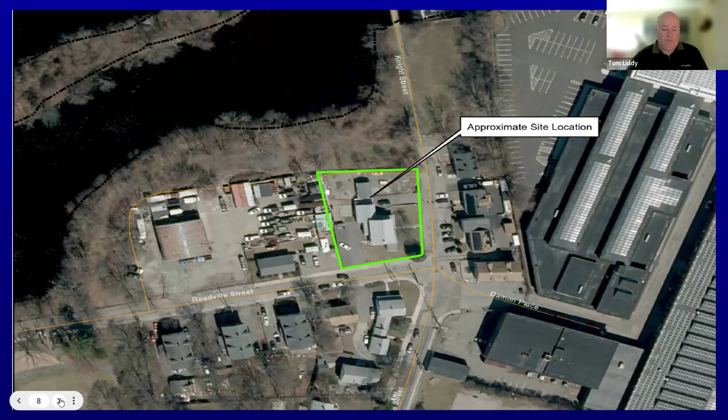To the north of the property is a wetland system associated with Mother's Brook, a perennial waterway with associated 25-foot riverfront area and waterfront area. There's a 100-foot buffer zone offset from the edge of BVW associated with the river, as well as the bank of the river. If you could advance to slide 3, please.

So this is a photo of the existing conditions as of last month. You can see there's been some earthwork that occurred. This area was all developed previously, so there's no removal of any vegetation, trees or shrubs or anything like that. This is the eastern part of the property; Knight Street would be to the right of the screen. If you could advance to slide 4.

And so this is the rear of the property. You can see there's been some earthwork, but this is very similar to what it was prior to the work that occurred last year. You can see a stockade fence in the rear. Behind that is parkland owned by DCR, and then Mother's Brook is off to the north.

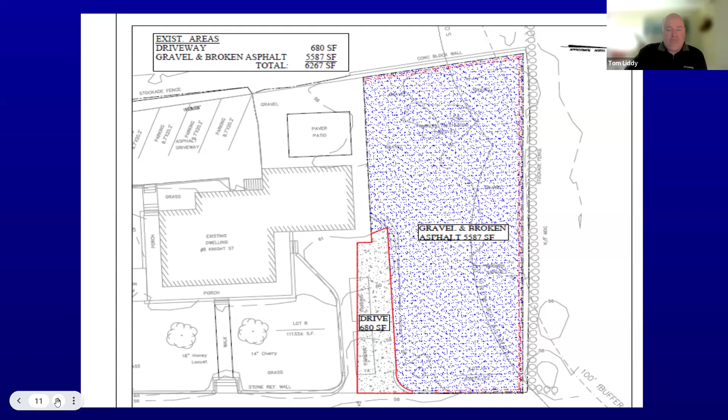Okay, so this is the proposed project. It's basically a 3-story, approximately 1,600 square foot, 3-unit residential building. You can see the 100-foot buffer zone, which extends to the east of the site. All the building and parking area in the rear has been located outside the 100-foot buffer zone. Any runoff from the parking area will be conveyed into a 2-foot deep sump catch basin, and then will be infiltrated with an infiltration system right next to it.

All the rooftop runoff will be directed into another infiltration system and 2-foot sump catch basin in the front of the property. And the existing driveway will be removed, and that area will be graded and loamed, and grassed into the property. Also, the existing stockade fence is in disrepair, so that will be removed and replaced in kind.

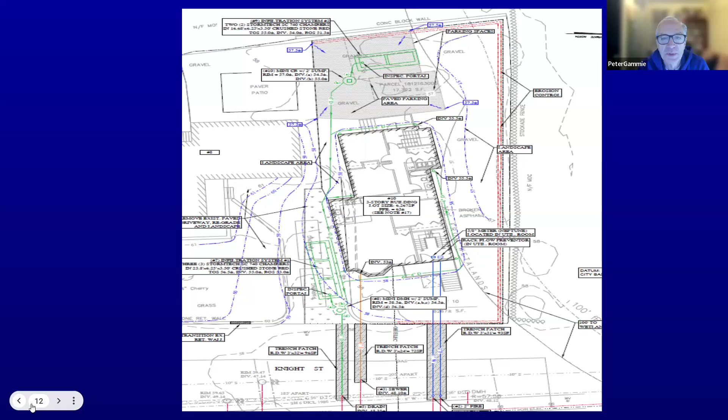So that'd be a great commitment that you could tell us and we could add it into any order of conditions. You could do it after the fact and send the calcs both to Boston Water Sewer to update their plans and to the Concom. I'll leave it up to Tom, but I would assume that the owner would be willing to do that. Yeah, I'm sure we would. So that's all I had.

Okay, thank you. Commissioner Linné?

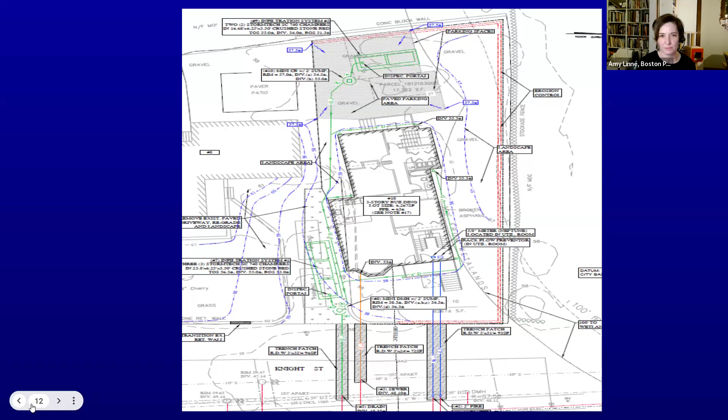I had a couple questions on the landscape plan, so we could go back to that slide. One question is about those existing trees shown outside of the property boundary. I believe you said you're replacing the existing stockade fence with this vinyl fence. Is there any intention to protect these trees just off the property line, and potentially use the same footing locations to minimize disruption to the root zones of those trees? So that's one question I had.

Then I wondered, the layout of the parking spaces - is the reason the two on the right are planned up further just because of the 100-foot buffer line? It just felt a little bit unnecessary to me, and maybe that's more of a design comment, but it seemed like unnecessary extra pavement that could be part of the lawn.

And then I wanted to hear a little bit more about the lawn area. I think it's sod you mentioned, and I wondered if there was any information on the species for that, and if it's something that could be like a fescue or a deeper rooting seed mix, just to provide better infiltration in that area.

So that's a lot of questions, but I think first is the existing trees outside of the property - anything to protect those as this new fence goes in?

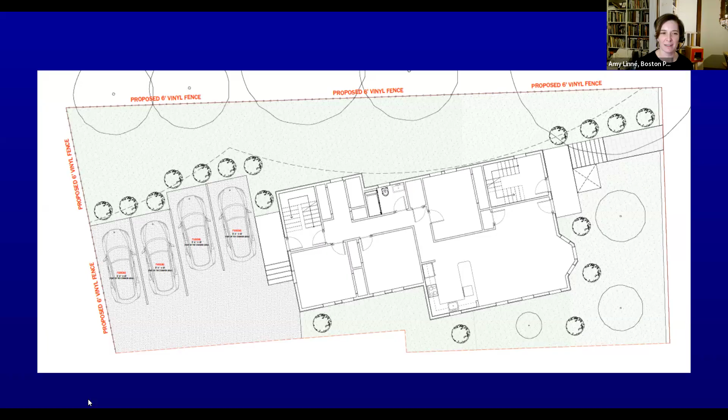Gotcha. And maybe one more comment—on the planting, just wondering if there could be a little more diversity. It's a lot of inkberry, which is great and fine, but there's a fair amount of plants going in, so maybe consider diversifying the species a bit. That's all, thank you.

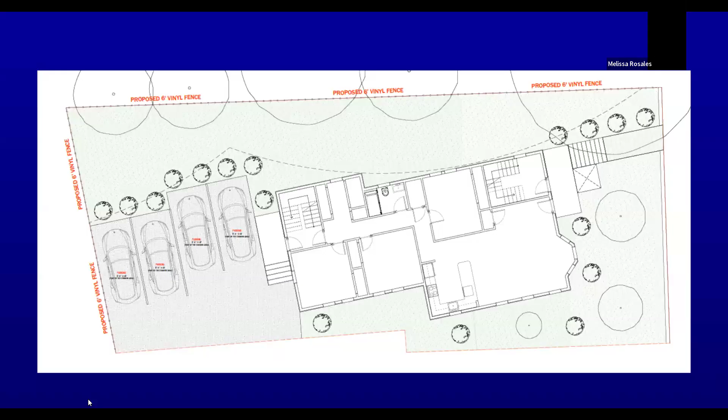How are we going to diversify the species? Do we have a commitment to do that? We could have the landscape architect look at it—I don't want to speak for Melissa, but she's here. Yeah, that's definitely fine, I can let the architect know so we can get that revised and bring a little more diversity into the species. Great, appreciate it.

Commissioner Wilson kind of asked my question already. In addition to the species, there's a couple of shrubs specified as feature plants versus what would probably wind up being more hedges. For the parking area, hedges are probably a good way to go. But whatever the mix is, if there's stuff able to provide forage—inkberry can do that, but other things too in the riverine habitat—I don't know how helpful DCR's planting list might be in this location, but that could be a place to start for riverine edge community type species.

Yeah, I think we could commit to a condition in the order requiring a revised landscape plan be submitted and approved prior to implementation. Well, thank you for having one in the first place—that's always good. You're welcome, good suggestion, thank you.

Thank you, Chair Parker. Appreciate that, and the diversification idea is great. A couple of things—I'm not sure about the address, because in the NOI it's 8, and this property, if you look at the site map, it's 6 and 8 Knight Street. Is that correct? Let me double check that. I believe it was 8, and it's 8 Knight Street, and when it gets subdivided, the subdivided lot will be 10 Knight Street. Okay, but if you look at the picture on your slide, it includes 6—that's why I got confused.

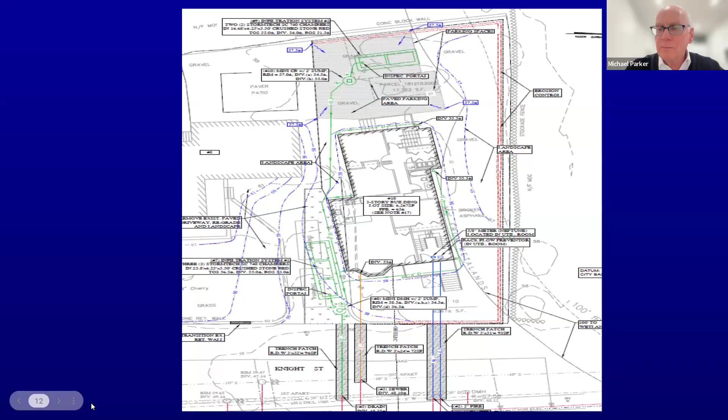I'm looking on Google Maps about what's what, and it's not clear to me. I think what they do with these is pull ISD addresses, which don't always jibe with either Google Maps or the city directory, so sometimes you'll see those discrepancies in addresses. That's helpful, Chair Parker, but we are saying the project is confined to 8, correct? So the original lot is 8 Knight Street, and they're subdividing that, with the new subdivided lot becoming 10 Knight Street. Yeah, I heard that—it's just, you may want to check that, I'm just not sure where 6 is.

In terms of orienting myself here, immediately north of the lot is where the water is, correct? Yes, so this view has been rotated—north is on the right side of the screen. And to the north is DCR parkland, then it gets into Mother's Brook, so the wetlands and the river are off to the right in this view, but north in terms of actual directions.

I'm seeing that there's a huge property to the east that appears to be completely impermeable. I'm wondering if there's been any flooding noticed on this lot at all, either from the body of water immediately to the north or from overflow from this huge lot to the east.

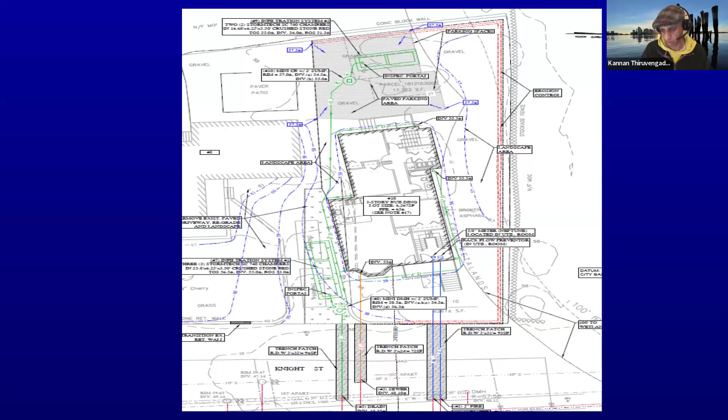Otherwise, I have no questions. Thanks. Commissioner Estes Margiazzi? Nothing further at this point. Commissioner Herbst? Nothing from me. Elena, did you see any hands from members of the public? I am not seeing any hands, and we haven't gotten any emails either. Anything in the chat? Okay.

So with that, I would entertain a motion to issue the order of conditions with the following special conditions: that the fence have an 8-inch space at the bottom to allow habitat to travel, a row of infiltration chambers in the area that Commissioner Sullivan had mentioned, that those plans or new calcs be sent to Boston Water and Sewer Commission, the plan submitted to staff, and also a new landscaping plan showing diversity of plantings be submitted to staff before work commences.

I'd like to make that first motion of the year. First motion of the year. Thank you, Commissioner Sullivan. I apologize for interrupting your first motion of the year, but I just want to make sure we close the hearing. Yeah, and close the hearing. Commissioner Sullivan jumped on me there, he was so anxious to do that. I saw he was anxious. And close the hearing. Yeah, and I'm all for it. I just saw everybody else trying to beat me out for mine.

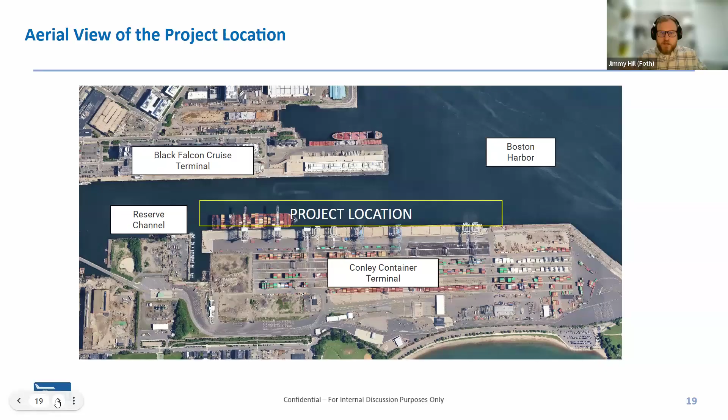This is an aerial facing southwest of the terminal. You can see there is some previous work being done there.

The proposed project is to mechanically dredge approximately 10,324 cubic yards of sediments from berths 10, 11, and 12. Berths 10 and 11 will be dredged to their previously authorized footprints and depths of minus 50 feet mean lower low water, and berth 12 to minus 45. Both will include a 2-foot allowable over depth for construction and 3-to-1 side slopes. The disposal location for the spoils will be in the Boston Harbor CAD cell, using dump scows, mechanically loaded.

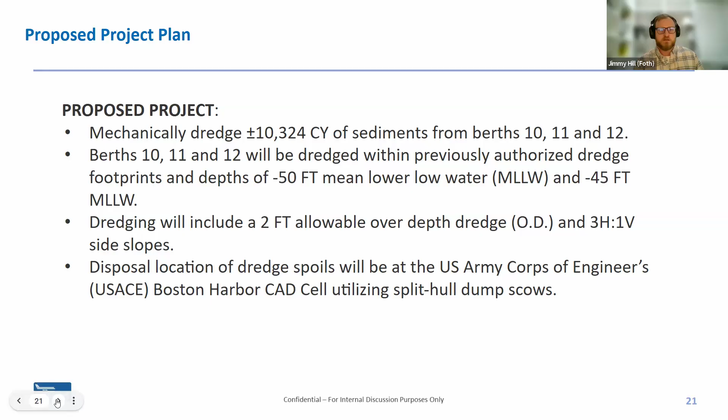This is another overview showing specifically berths 10, 11, and 12. There's currently a ship in berth 10 in that image. The disposal location, the Boston Harbor CAD cell, is about a 3-mile tow to the north.

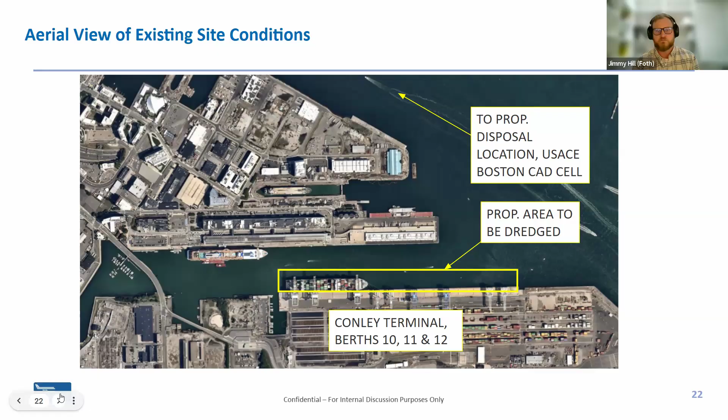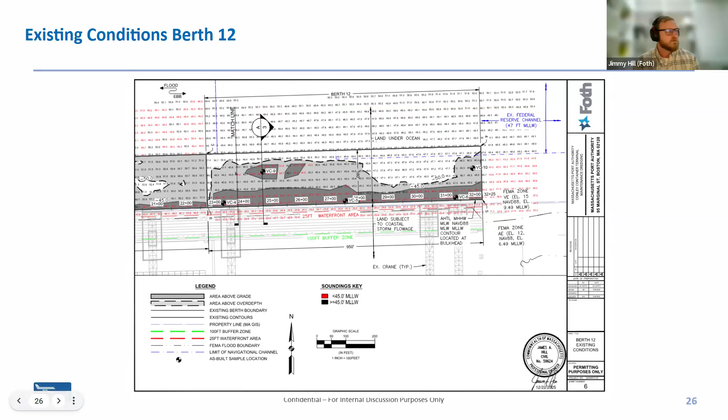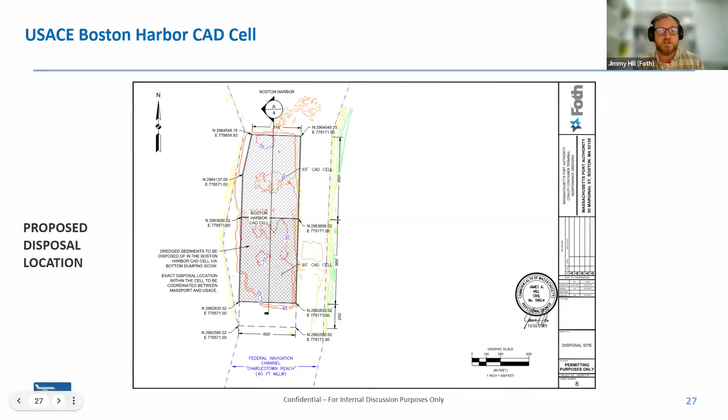This shows the Boston Harbor CAD cell, in the Charlestown Reach of the Federal Navigation Channel. The exact disposal location within the cell will be coordinated between Massport and the Army Corps of Engineers during construction.

The resource areas and proposed impact are to DPA and land under ocean, approximately 119,132 square feet and 10,324 cubic yards of sediments.

For turbidity control, we propose no scow overflow—making sure that when loading the scow, no sediments or water skim off the top back into the water. No scow washdown means it'll be a clean operation with an environmental bucket when possible, so sediments don't drip onto the side of the scow, since washdown would increase turbidity. So we propose no scow washdown.

Turbidity curtains would work if required, but we haven't seen any DMF recommendations yet. I know conservation reached out, but I'm not sure if they've heard back, so we're not sure what time-of-year restrictions we'll have to adhere to.

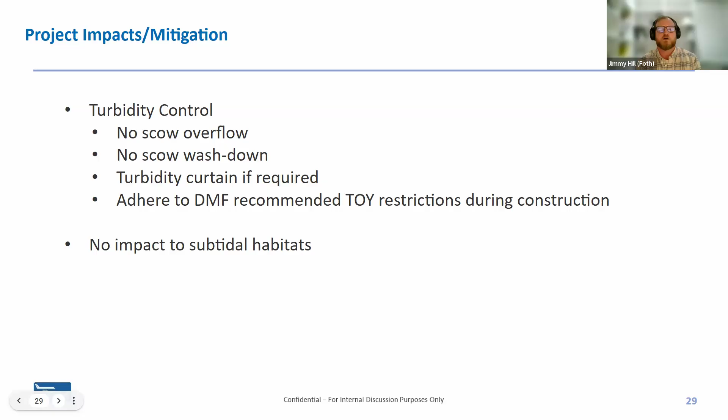I guess that'll wrap it up. Thank you.

Okay, I didn't see a DMF letter in there as well. Elena, any late breaking news on that? Unfortunately not, no—that was going to be my only comment.

So Jimmy, you said, and I think we have Chris here, that you would comply with DMF time-of-year conditions should that letter come in. If we close the hearing and issue an order of conditions with a special condition that you comply with the DMF letter—DMF also, besides time of year, will usually suggest other appropriate measures—would you comply with everything in the DMF letter before construction?

Sorry to jump in here—Chet's here. There was a bit of a lapse in the preparation of the presentation. As you know, the depth at Conley Terminal is about 50 feet, and I don't think it's possible for us to implement silt curtains in water that deep. I apologize for my consulting team having stated that, but there's no way logistically we can implement that. Okay, we've run into that issue before.

Other than that, I can say that we routinely review the conditions from DMF and should be fine with the majority of them—we rarely dispute them. The silt curtains are usually the only big issue. We've had a fair amount of work between Conley and the cruise port over the past 18 months to a year, and I don't recall the requirement for silt curtains coming through DMF, so that would be a first if they did require that.

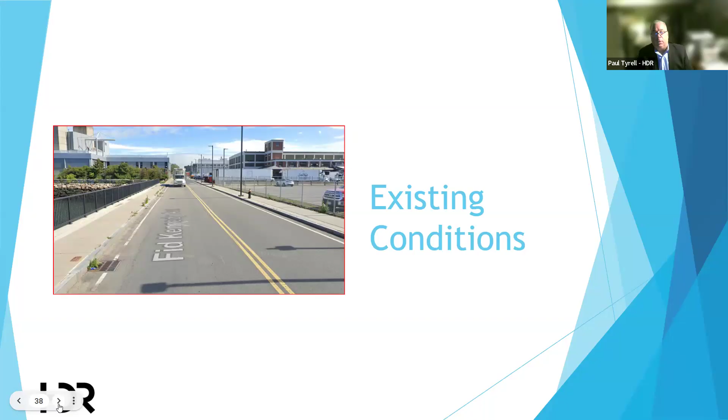This is turned around, looking back towards the Pavilion facility, and this is the alignment where the realigned roadway will actually go through the city's parking facility. The city is losing a number of parking spaces and revenue associated with that to provide improved access and improved traffic in and out of the facility.

So this is a plan view. You can see I noted the locations of the four photographs to orient you again. North is up the page. We've got the roundabout at the end of Fid Kennedy and Northern Ave at that location. You can see I've annotated Fid Kennedy Ave as it comes down, and there's that tight turn, and it comes down to the connection along the waterfront.

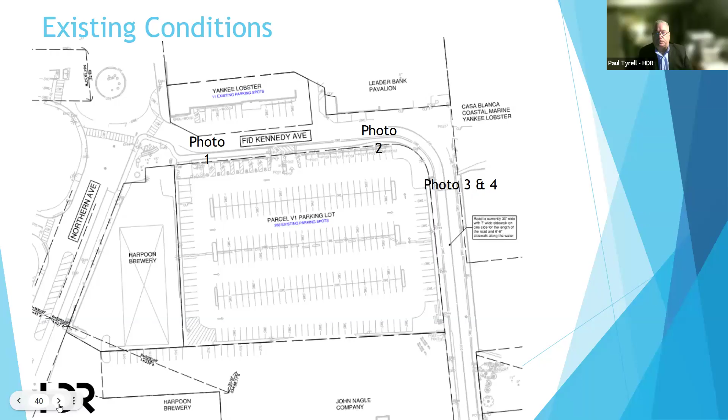These are the proposed improvements. As you can see, there's a substantive shift of the alignment into the existing parking lot. It's created an opportunity for green space that will allow for snow storage. As you can see in the cross section, there's a sidewalk on both sides of the facility. There's a substantive reduction in parking as a commitment to improvements of both vehicular and pedestrian safety. To the top, you can see the improved parking for the Yankee Lobster facility - I keep calling it Hook, I apologize - and then the roundabout facilities we've accommodated for deliveries to the Leader Bank Pavilion.

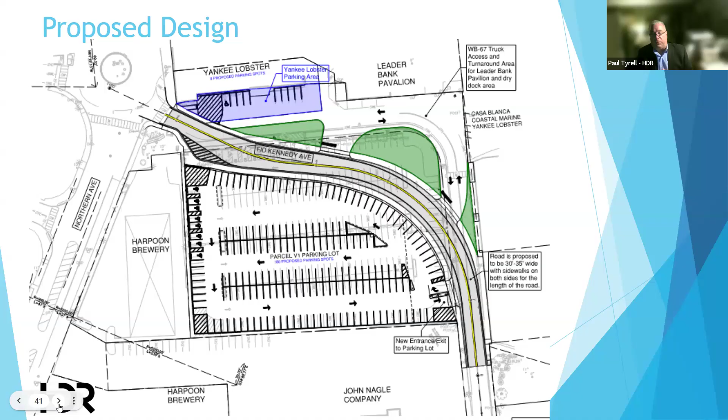Though this is not an environmental consideration, we wanted to demonstrate that one of the reasons driving the alignment of this roadway, and what's driving the impacts to the parking, is the fact that we need to get the WB-67s through here. They're significant, and we want to get them off Northern Ave and keep Northern Ave as part of a public thoroughfare, but we did want to make sure the public had a more direct connection to the waterfront.

This is just a quick overview. It's very difficult to read the whole thing, but as I put a few annotations, there are a number of existing outfalls in the facility. We are not proposing anything substantively different from what's there today. As a matter of fact, there's a reduction in peak rate runoff because of the reduced amount of impervious surfaces. We are using existing facilities and drainage outlets as well as a water quality structure that exists out there today, so there's no new outfall connections - we're connecting to existing systems.

I will say that this has been reviewed by Boston Transportation. It's been reviewed by Boston Water and Sewer. And we have utility coordination ongoing for the poles that need to be relocated, as I mentioned.

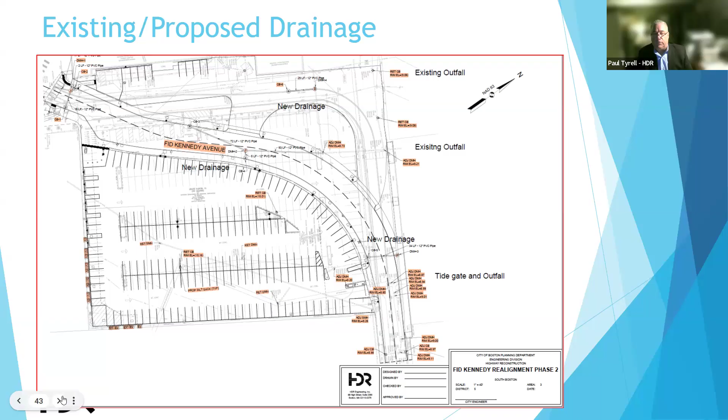So in conclusion, one of our intentions was to minimize the environmental impacts of the proposed realignment, reduce the amount of impervious surfaces, which will increase water quality. It also meets the obligations of the designated port area, participating in the growing and ongoing master plan for improvements of Flynn Marine Park. It minimizes impacts to the tenants - we've coordinated with all the tenants throughout the facility. It does provide utility upgrades; as I mentioned, the utility poles you see in the photograph on the left all need to be relocated. And the design has been coordinated with various city agencies positively.

With that completes my presentation, and I'm happy to answer any questions you may have.

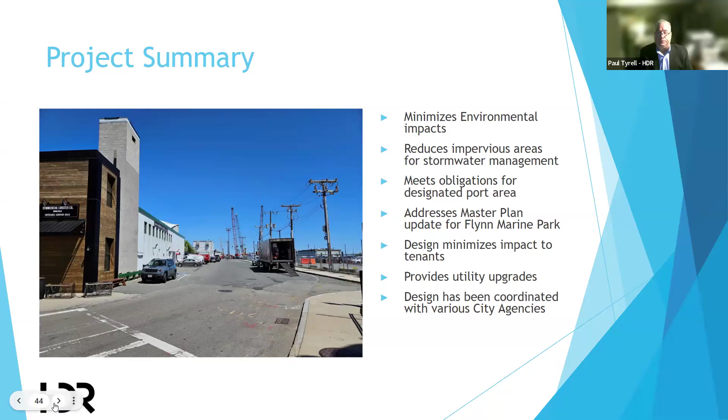Thank you, Paul. I was looking up the turning radius of a WB 67. They're bears. Yes, sir, they are. Wow, okay.

As you can see, the impacts to the city system, to the revenue associated with the parking lot, is rather substantial. And I have to apologize, I wanted to recognize Gigi from Boston Planning, who's sitting in the background waiting to correct me if I make any mistakes.

Great, okay, thank you. Elena, do you have anything on this? I do not, thank you. Okay, thank you. Commissioner Sullivan?

My only comment is I know BPDA was doing a coastal resilience study for the whole area there. Has this all been coordinated with those people doing the study? Yes, I'm sure Gigi will confirm that, but we are working directly for the capital construction program that I believe is the one responsible for that study, Mr. Sullivan.

Yeah, well, that's good. And it's good to know that somebody is watching you, Paul. That's good to know, thank you. I'm hoping to get your first motion of the year, if that's possible. It's a good chance because everyone else has been put on notice. That's all I had.

Okay, Commissioner Linay. I was curious about the lawn areas and who will be maintaining those, and is Fid Kennedy considered public right of way or a private way?

So it is solely owned by Boston Planning, and there is a long-term plan for Boston to possibly someday turn these roadways over for public future ownership. However, when it's constructed, it will still be owned by Boston Planning.

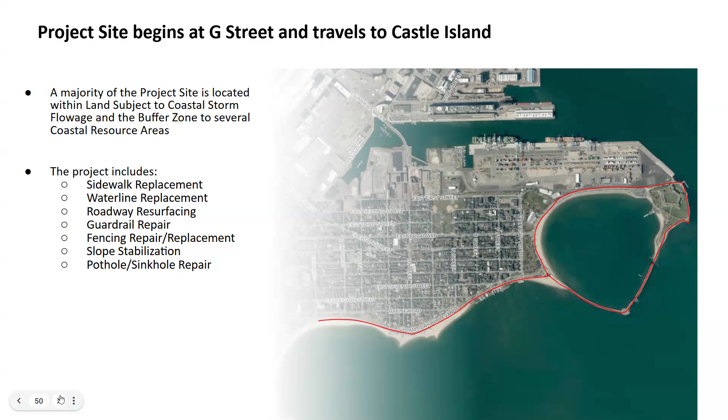Next slide please. All right, so the project begins, as I said, at G Street, travels out to Castle Island, and throughout this entire process we have sidewalk replacement, a water line replacement, roadway resurfacing, guardrail repair around the Castle Island parking lot, fencing repair and replacement at Kelly's Landing and all around Castle Island, a little bit of slope stabilization in one spot on Castle Island, and then a pothole and sinkhole repair out on the Head Island Causeway. Next slide please.

All right, so I broke the presentation up into segments pretty much based on the type of work. So from G Street to the Pleasure Bay flagpole down by Kelly's Landing, we're replacing all of the sidewalks on the water side of the street. The construction methodology is going to be identical to that which the commission has already seen and approved for the sidewalks further south on William J. Day Boulevard and further up to the north for the Murphy Rink.

We're also going to be replacing some sidewalks on the northern side of William J. Day Boulevard for the Lago Playground and Marine Park that comes around there, and repairing the railing at Kelly's Landing.

That is not a chain link fence or anything along those lines, I have some photos later I'll show you. But that railing is just going to be unbolted, brought out, sandblasted, painted, and then brought back. So the work will be occurring off-site. Temporary fencing will be installed in that area, obviously, to prevent people from falling into the ocean.

Then down in that area by the flagpole, they're going to replace a water line in the parking area that's around there, and install a couple of water fountains and washing stations within the paved areas of that landing there. And if the next slide, please, we have some pictures of what that area will look like with the work as proposed.

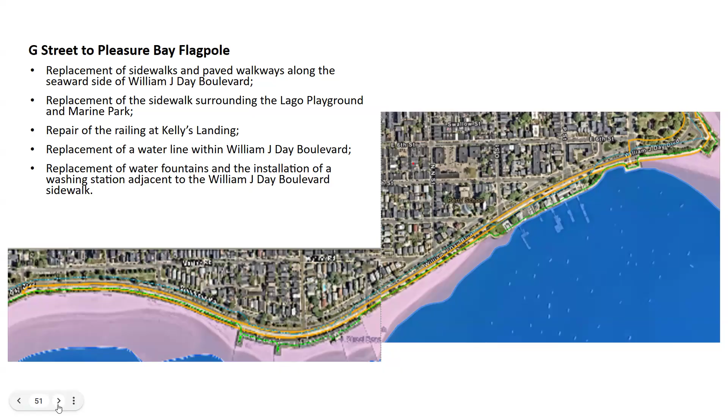So this is where most of the work is happening here. As I had said, from G Street all the way up, it's the sidewalk replacement. The commission's very familiar with that. But this is that area right at the Pleasure Bay flagpole.

You can see the dash lines coming in. It's all within the already paved surfaces that the water line will be run under. These areas will be resurfaced. Tree protection will be going up, so there's no loss of trees or anything along those lines in this area. Next slide, please.

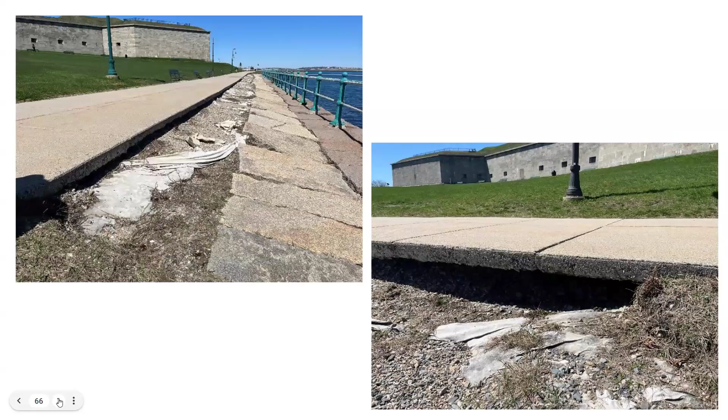Here's the area where we're going to have a little slope stabilization. This is probably the one area of the entire project that's not going to look exactly the same as prior when we're done. As you can see, we're having some erosion come through, a lot of it coming from the upland side, just runoff sweeping down. Once the erosion starts, there's really not a whole lot you can do.

You can see some fabric. They've tried just loaming and seeding in the past and putting crushed stone in the fabric down, and that hasn't worked. So what we're going to try to do is, with a Versa-Lok block, put that in between the granite you can see and the sidewalk, then loam and seed over that. The Versalock block will hardly be seen, but it should stabilize that slope and prevent further erosion.

It will help maintain the historic look because the area will be grassed. That's the appearance it will have, because one of the issues for all the maintenance activities out here is coordinating with Mass Historic to make sure everything we do maintains the historic character, especially around the fort. I know it's a little hard to visualize when I'm talking about Versalock blocks and vegetating over them, but the next slides I hope will provide a little clarification.

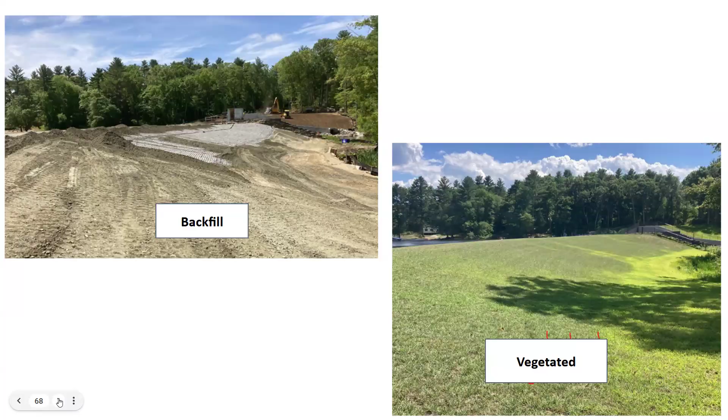And so that is it. I'd be happy to answer your questions. I know this presentation was probably about 16, 18 pages long, so there's a lot of stuff in there, but I'd be happy to entertain your questions at this time.

Okay, thank you, Tom. Happy to see that Legos has entered the industrial world with their materials there. That's a pretty cool technology there.

So this is a rather large public works project. When I first looked at this, I guess I didn't understand the scope of it. I'd ask Tom Volton, how long is this going to take, and can you give me an idea what the budget is? This was all driven by the 250th anniversary of the tall ships and the expected crowds we're going to be having at Castle Island. So this is an initiative to beautify and make things safe for everybody that's going to be out there.

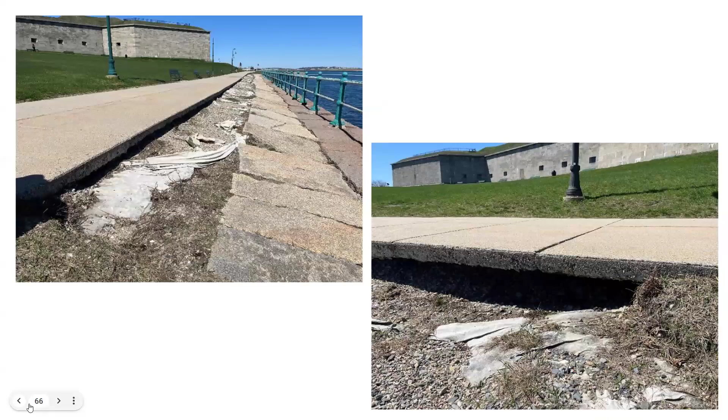So we'll just want to have that all approved, okay? Because I don't think you've sent that into us. So one of the conditions would be that part of the work can't be done until you send a letter of approval to the commission staff.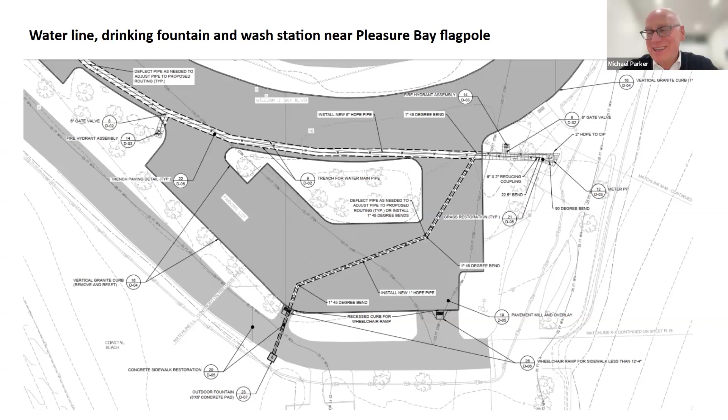Commissioner Linné. I just had a couple questions about the causeway.

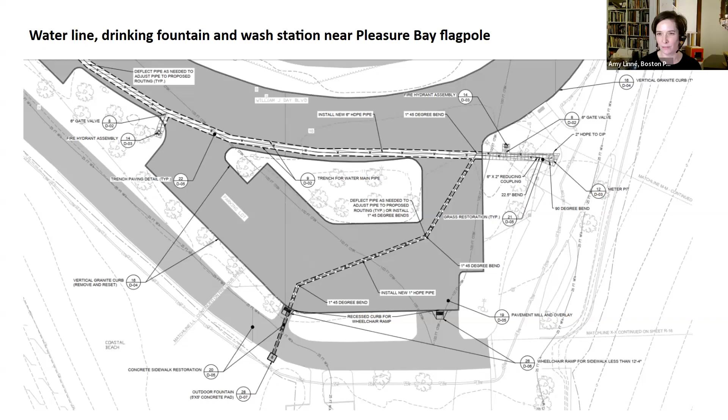As you replace that chain link fence, are you trying to salvage existing posts or replace the ones that are obviously deteriorated? And are you running a silt sock along that entire length during the milling and overlaying work? There's so many things in that tiny little area, so many line types between buffers, banks, fences, but we are proposing erosion controls everywhere, because we do have to mill and overlay and pull up any fence posts that are deficient. So we definitely need erosion control there.

Okay, great. Thank you. That's all I have. Thank you, Commissioner Wilson?

Yeah, appreciate the scope and scale of what you guys are trying to achieve out there, it's a great landscape. I guess two questions for you. One is whether there was any place where there was use for geotextiles or similar filter fabrics and things like that to try to help shore up what you were doing out there, or whether it's just too harsh and extreme of an environment.

So one of the reasons why we're doing that slope protection - Tom didn't mention it - but a lot of the erosion is coming from the seaside during heavy storms. There is regular sheet flow coming from the sidewalk and everything, but the majority of that washout is coming from heavy storms from the ocean side. Operations has filled that void probably five times in the last four years. So we're trying to create something that's a little bit more hardscape, but still keep the natural feel of the grass visually. We've been working with Natural Heritage to get that type of aspect approved.

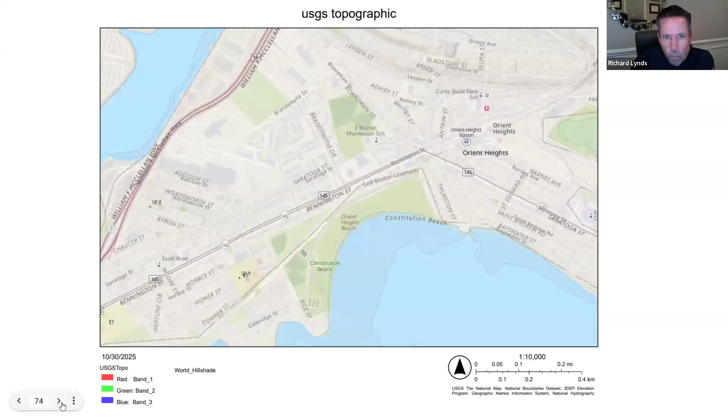If we want to jump down to slide 5 of my presentation, I'll try to be as brief as possible and respect the 5-minute presentation rule. Mr. Chairman, members of the commission, this is a proposal to subdivide an existing vacant parcel into 2 parcels and construct a 3-unit residential dwelling on the subdivided parcel.

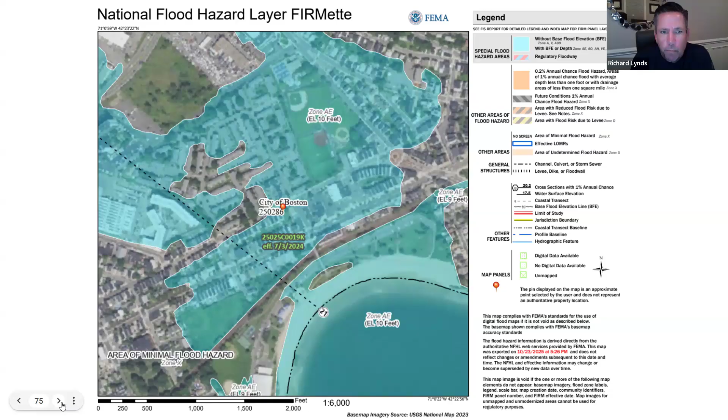This property is located—we can jump down one more slide, I think that's probably the one that works best. This site is located in the Orient Heights section of East Boston, along one of the main thoroughfares, Saratoga Street, which leads into Orient Heights proper as well as the rest of the neighborhood as we head south towards Maverick Square. Our proposal would create the 3-unit residential building.

We are proposing this as a slab-on-grade construction. If we can jump to the next slide, please—this is a good place to start. You can see here the existing conditions on the site. There is an existing driveway located closest to the right side of the property. Because this project is compliant with the new amended zoning for East Boston, there is no requirement for off-street parking for either of the sites.

We'll talk about 915 shortly. We are not proposing any off-street parking on site, and as a result we're able to close up the existing driveway that exists on Saratoga Street. Next slide, please.

Just to give the commission an idea of location, immediately to our left of the site is a commercial building, as well as located directly to the rear. As you can see, the site is vacant. During a site visit with staff, we were asked whether the site had any history of structures on it. Our review is that there's never been any structures here—it's essentially been preserved in connection with the adjoining three-unit dwelling located to the right.

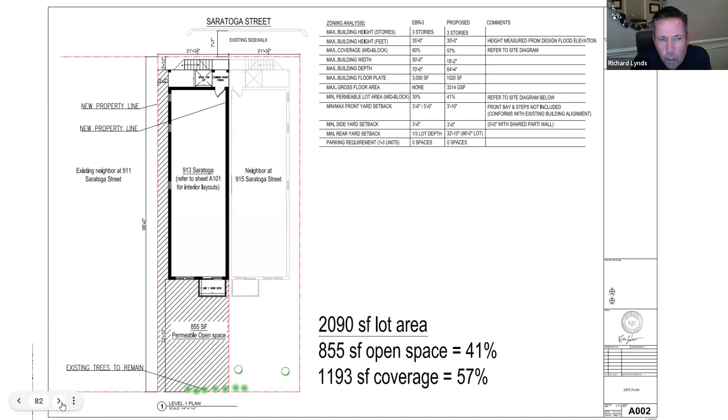Just some information about the zoning and the site itself, probably not the most relevant at this stage. We can jump to the next slide. Our floor plans, next slide. Elevations are probably the most important for this part of the conversation. Next slide, please.

One thing I'll point out for the commission is this is located in the Coastal Flood Resiliency Overlay District. The building has been designed to be in complete compliance with CFROD requirements under Article 25A of the zoning code. We have confirmed with the Boston Planning Department and the resiliency officer that this has been designed to meet all the requirements under coastal flood. Eric, I don't know if there's anything specific you want to add to this, but I believe that is the extent of the presentation for purposes of the architecture.

Peter Gammy, who is our engineer, can address or speak to any of the other civil matters that the commission may have. So I'm happy to answer any questions by the commission.

I think you're on mute, Mr. Chairman. I'm sorry, thank you. So did you read my lips? Did you get my question? I wasn't looking at the screen. I apologize. Okay, so a question that always comes up, I'll preempt it.

What's going on with the roof? We're going to do some sort of green or light colored, green roof or light colored materials up there? Yeah, sorry, Eric, go ahead. Eric Zackerson, architect for the project. The plan is to do a light colored EPDM or TPO roof on the flat surface.

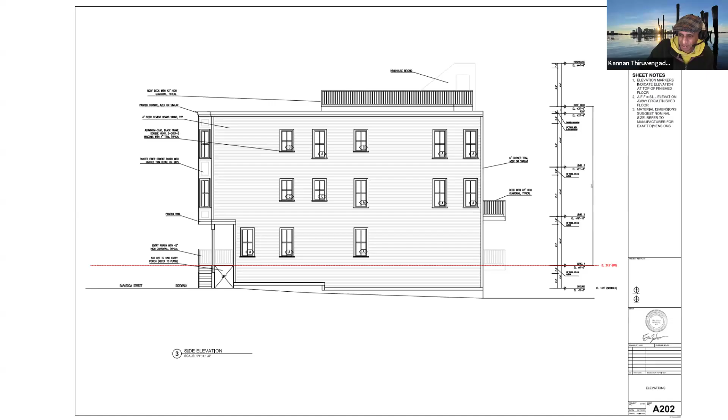None of that matters, everything's underwater at this flood elevation. The good news is they don't have any parking, so they can go to their rowboats rather than their cars. So that's the plus.

Thanks, all right, thank you. That's all, Chair Parker. Great, thank you. Commissioner Smargiassi? My questions just got answered. I was wondering about the flood elevations, so it's good to see this drawing brought up. Great, thank you. Commissioner Herbst?

I guess just a question, although if you're saying you're doing triple what the Boston Water and Sewer Commission requires, it may be irrelevant, but do you have any plans for maintaining your pavers? Because they won't stay permeable for long if they aren't maintained. I think the short answer is yes. It's pretty standard, the pavers themselves will be cleaned and vacuumed and maintained in terms of any weeds or things growing up in between them. Much more beyond that, there's not a whole lot you can do.

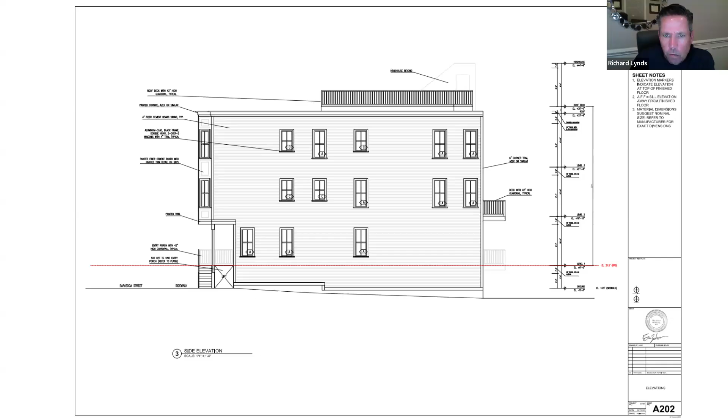I suppose at some point in the future you could replace them all, but I guess I was referring to vacuuming, and when I see this small amount of area, I wonder who's going to invest in doing that. Is this owner occupied or rented? Through the chair, this is intended for home ownership, and when we did our site visit with staff, we indicated there may be certain conditions we can incorporate into the condominium documents as well, that would be permanent for the property. We have experience doing this with other projects, so we understand those concerns can easily be folded into rules, regulations, and items in the master deed. Okay.

As I say, in this case, it sounds like you have prepared for the stormwater needs, so not such a big issue to me. That's it for me. Thanks.

Okay, thank you. And thank you for bringing up that home ownership issue, Commissioner Herbst. So one thing we'd want, Richard, is the master deed to reference the order of conditions so that future homeowners know that they're in a subject to Concom jurisdiction and that there are certain requirements, and one of them would be maintenance of the pavers. So we'll be putting that into the order of conditions.

Elena, any hands raised? No hands raised and nothing in the inbox or the chat either. Okay. And Elena, do we have that in our standard conditions?

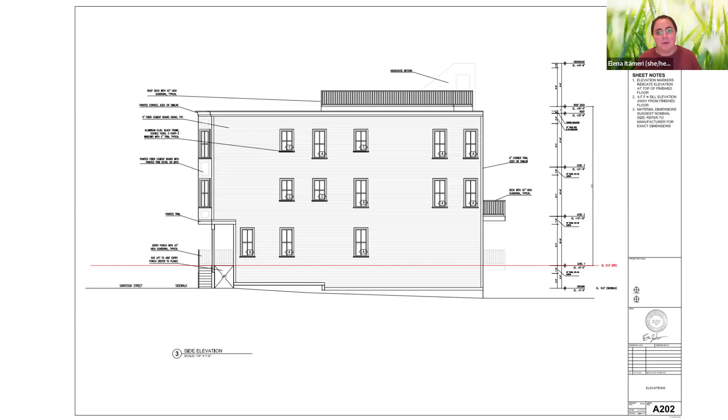Regarding pavers, no. So I can make a note of that and we should include that in the motion as well. But I can pull from previous. Yeah, we do it all the projects where time. So yeah, we've had that language.

Okay, great. So with that, I would entertain a motion to issue the order of conditions with the special condition that notice of the order of conditions be included in the condominium governing documents and to close the hearing. Continuing my marathonic quest, I'd like to make that motion. Fantastic. And I'll second it, continuing mine.

Perfect. Commissioner Sullivan. Aye. Commissioner Linné. Aye. Commissioner Wilson. Aye. Commissioner Conan. Aye. Commissioner Smargiassi. Aye. Commissioner Herbst. Aye. And I vote aye.

That carries 7-0. Okay, Richard and team, don't go away. Next item is notice of intent for DEP file number 006-2095 and Boston file number 2026-004 from Law Office of Richard C. Lynds on behalf of 913 Saratoga Street LLC

for the proposed construction of a 3-unit residential building at 915 Saratoga Street in East Boston. Resource area land subject to coastal storm flowage. Floor is yours. Thank you again, Mr. Chair, and through to the members of the commission. For the record, once again, my name is Richard Lynds. I'm an attorney with the business address of 245 Summer Street, East Boston. On behalf of the petitioner, with me, Fraser Allen, owner representative, as well as Eric Zachrison, the project architect, and Peter Gammy, our engineer.

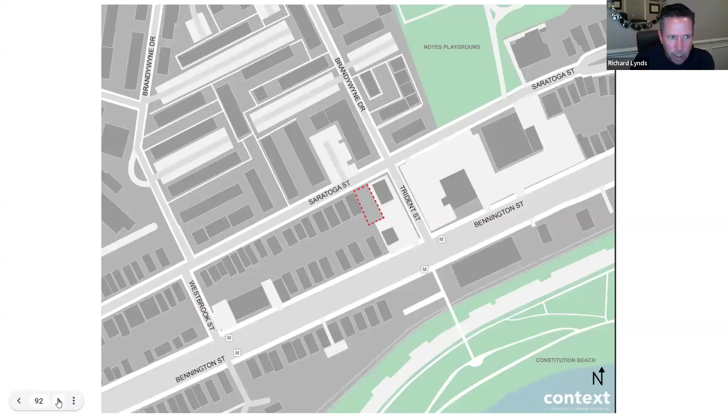I will make the record, because I know this is a separate and independent hearing, Mr. Commissioner, but I'll try to be as brief as possible. I know you have a large agenda, so if we can jump right down to slide, I believe it's slide 5, just as the quick overview of the site. One more, there we go, perfect. So again, this is located in the Orient Heights section, immediately adjacent to the last hearing that we just covered.

This is on Saratoga Street, main thoroughfare in the East Boston neighborhood, located in a coastal flood resiliency overlay district, and again, a vacant lot that is being subdivided to allow for the construction of a new 3-unit residential dwelling. Next slide, please.

Existing conditions showing the vacant lot located immediately adjacent to an existing triple decker at 911 Saratoga Street. Next slide, please. And just another view showing the surrounding context of commercial buildings and existing driveway that will be closed in connection with this project, as we do not have any requirement for off-street parking and not proposing any off-street parking. Next slide, please.

Next slide, please. Existing conditions plan, next slide. And our proposed conditions plan, we can see very similar to the last presentation we made, where we cover less than 60% of the ground with proposed structure, and we maintain approximately 40 some odd percent of permeable space on the site, both consistent with the regulations, new regulations adopted for the East Boston Neighborhood District under the Boston Zoning Code. Next slide, please.

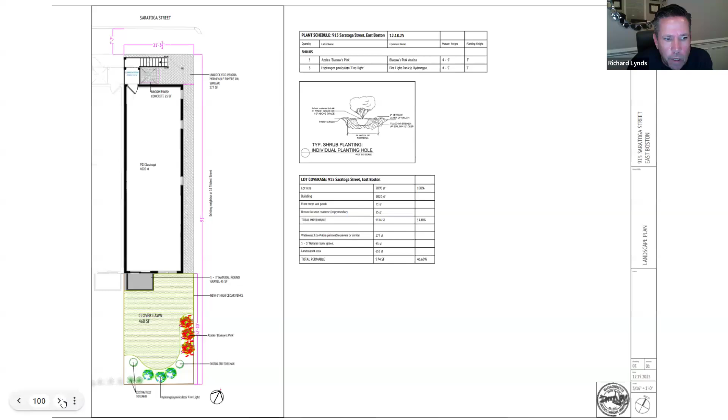Next slide. And our elevations, as we showed last time, and as I mentioned, this is the Coastal Flood Resiliency Overlay District. Our building has been designed to be completely compliant with Article 25A of the code. As you can see here, we do indicate the base flood elevation as well as the design flood elevation 2 feet above the area that's been identified as base flood elevation. This is access from a stairwell in the front.

There is a lift that would allow for access for those with disabilities to get to the main level. Once again, this is a project that involves 3 residential units, no parking, and is completely compliant with the Boston Zoning Code. I will pause there and allow the commission to ask any specific questions of the architect or the engineer or the proponent.

Okay, thank you. If you'll indulge me, this is an off-topic question. The buildings are so close, and it's not a party wall. How did that work with the fire code firewall?

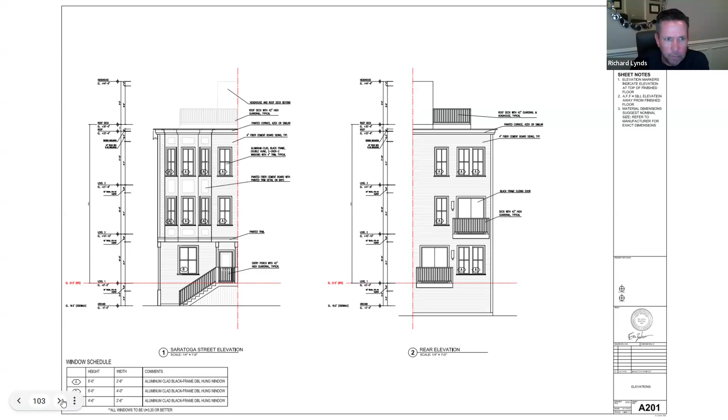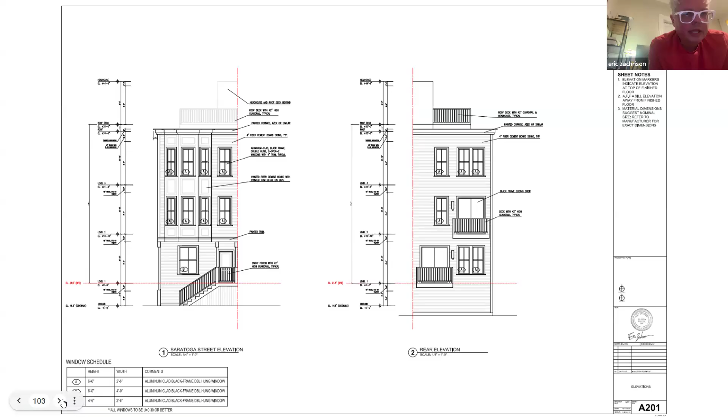I'll let Eric Zachrison address that. What's the separation you need there? Is it special materials? No, nothing particularly special. They both have a 1-hour wall. Effectively you can't add them together, but both buildings would have a 1-hour wall with the anticipation that at some point one or the other could be removed or could burn down. Both will have their own freestanding 1-hour wall in such a way that they could be removed if needed. Oh, interesting. Okay, thank you, and I apologize to everyone for indulging me in an off-topic question here.

Elena, what do you have on this? Apologies, I was muted. I don't have anything to add.

I did have a quick clarification because I'm assuming the motion is going to be pretty similar to the last project. For the conditions, we noted that this should be included in any deeds related to the condos, and I wanted to confirm that we did want to include the special condition for paver maintenance. Yes, perfect. Not so much a comment as a clarifying question — I thought we had a condition in there regarding pavers and the maintenance of pavers. We have a condo condition, we have conditions related to pavers, and we sometimes have a condition related to the maintenance of the pavers being included in the condo documents.

So it kind of covers it. Yes. So I just wanted to make sure that we'll cover all bases with all three categories. Okay, thank you.

Commissioner Sullivan, no questions. Commissioner Linné, no questions for me. Commissioner Wilson, no further questions, thank you. Commissioner Conan, none from me either. Commissioner Smargiassi, no further questions. Commissioner Herbst, no questions. Wow, that was a first.

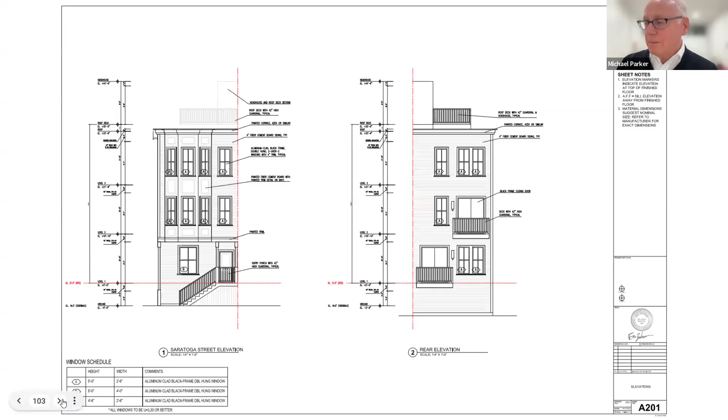Thank you. Commissioner Sullivan? Aye. Commissioner Linné? Aye. Commissioner Wilson? Aye. Commissioner Conan? Aye. Commissioner Estes-Margiassi? Aye. Commissioner Herbst? Aye. And I vote aye. That carries 7-0. Okay, thank you. Thank you very much. Have a good evening.

Okay, next item on the agenda, notice of intent for DEP file number 006-2093 and Boston file number 2026-002 from Fort Point Associates on behalf of MP Properties Roman numeral 5 LLC, care of Marcus Partners, to perform a geotechnical analysis and evaluation of subsurface materials by conducting up to 11 test borings and 6 VibraCore samples at 3 Dolphin Way in the South Boston waterfront neighborhood. Resource areas include 25-foot waterfront area, designated port area, land under ocean, fish runs, land subject to coastal storm flowage, and 100-foot buffer to coastal bank.

Who's here on behalf of the proponent? Hi Chair Parker, I'm Erica Frazier with Fort Point Associates. With me tonight is Ken Fields from my office, Danielle Blake with Marcus Partners, and from the City of Boston, Yun Chai. Thank you, great, okay, the floor is all yours, Erica.

Thank you, Dee Dee, if you could progress the slides. Oh, the wrong package — I believe this may have skipped one. Thank you. So if we could progress 2 slides, that'd be great.

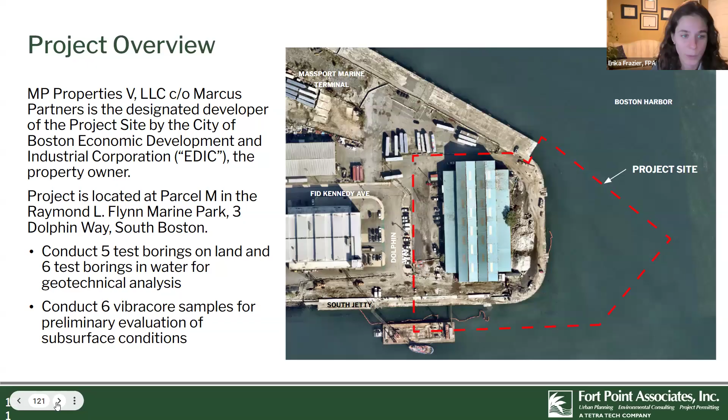As Chair Parker mentioned, the existing resource areas and buffer zone at the project site include coastal bank, land under ocean and DPA, fish run, land subject to coastal storm flowage, the coastal bank buffer zone, and the City of Boston waterfront area, which is 25 feet.

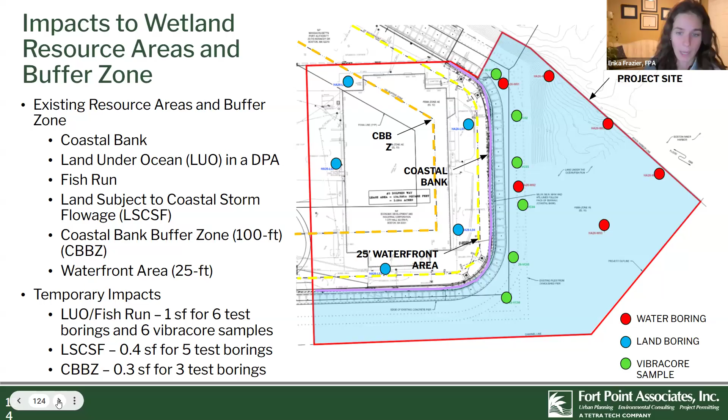So we will have temporary impacts to land under ocean and fish run with regards to the 6 test borings and 6 vibracore samples for approximately 1 square foot of impacts. For land subject to coastal storm flowage, there will be 5 test borings, which results in 0.4 square feet of impacts. And then there will be 3 test borings in the coastal bank buffer zone, which will result in 0.3 square feet of impacts.

For mitigation measures, the boring material will be containerized in drums. The casings will maintain the work in a closed system to minimize turbidity. No discharge of any pollutants during construction or upon completion. The project site will be maintained in a clean and orderly manner, and all asphalt and paved areas will be restored to match existing conditions. We will prepare a spill management plan in accordance with the order of conditions. Also, Mass DMF did waive the time of year restrictions for the in-water work.

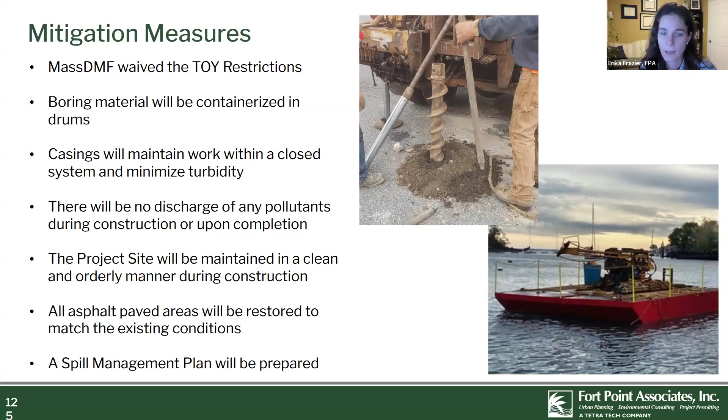Next slide, please. And that is our quick presentation.

Erica, sorry, this is Danielle Blake from Marcus Partners. I just want to say, obviously this is for the boring program to do due diligence to understand the geotechnical conditions at the site. Just by way of background, we were designated the parcel for a new ground lease and a redevelopment opportunity, so we would be coming with a future NOI for the proposed project.

Yeah, appreciate that, adding that context, Danielle. Mm-hmm.

Chair Parker, you're muted. I have a sick child in the background here, so I have to keep muting.

No, I appreciate that, especially since you put in the NOI for the soil borings, I think we would be on the lookout for something else. But thank you. Yeah, I think we mentioned it in our NOI as well. And congratulations on that. Okay, so I don't really have any questions on this, and I apologize. In one of my ways to try to move this hearing along, I found a new way to do that. I just skipped over the last proponent and went straight to you, so hopefully it didn't take you by surprise. But we'll head back to the NOI that was supposed to be in this place. I don't have anything on this.

Elena? I didn't have anything on this either. I was going to mention the DMF comment, but Erica covered that, so we should be set. Okay, thank you. Commissioner Sullivan?

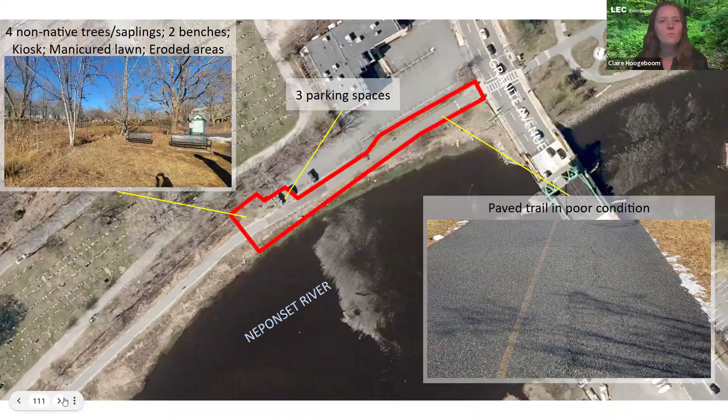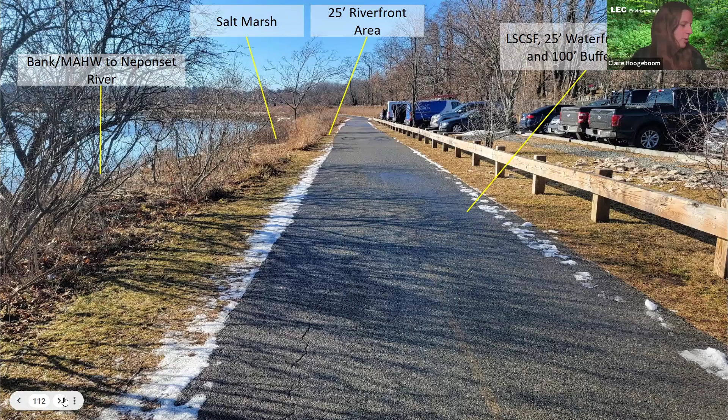And as Chairman Parker pointed out, the entire site is mapped within the area of critical environmental concern, I believe is what you were looking for. I think Commissioner Cannon pointed that out in the chat as well. Next slide, please.

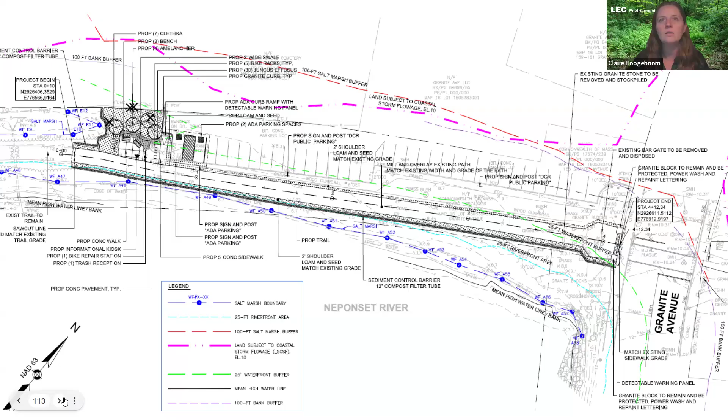So our notice of intent application addressed the performance standards applicable to this project. We discussed riverfront area. We only have 70 square feet of work within riverfront area. It's within the gravel shoulder again, but under the Wetlands Protection Act regulations and the Boston Ordinance regulations, it is considered a minor or exempt activity.

Nonetheless, the project is located within land subject to coastal storm flowage, and that is the entire project footprint within that. So we did address that under the ordinance regulations in our notice of intent and also address the buffer zone. Additionally, Stantec prepared the stormwater checklist and a brief memorandum documenting the redevelopment project's compliance with the stormwater management standards to the maximum extent practicable.

And of course, DCR has an operations and maintenance plan for MS4 compliance that would be implemented and continue to be implemented at this site as it is presently. Next slide, please.

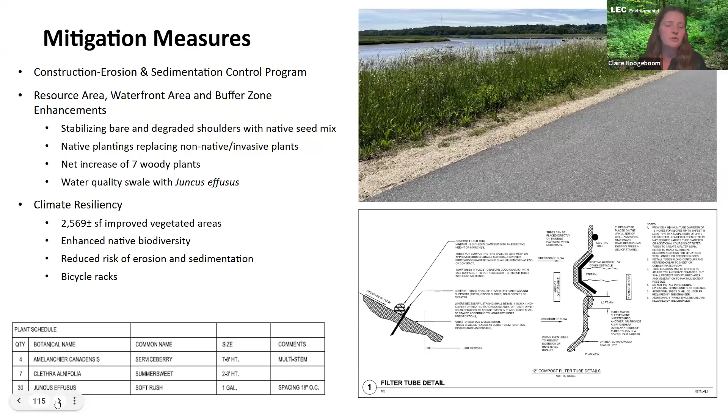But I think with that, next slide is, I believe, goes to questions. So happy to pass it back to the commission.

Fantastic. Thank you. And so, mea culpa here, it's very embarrassing for an environmental attorney to flub an acronym. That's my whole life. But I was looking at phase one environmental site assessments all day, and condition of environmental concern means something very different in that context. It means contamination, basically. And I just realized for the first time we're using the same term for two things that are really the total opposite of each other.

So that's my explanation, and I'm going to stick with that. I don't really have any questions on this. Eleanor, what do you have? Yeah, excuse me, we didn't really have any questions or additional comments either. Just want to flag that there are some site visit photos in the Drive folder. But we conducted a site visit and felt like all of our questions were answered at that point. Great, thank you. Commissioner Sullivan.

Yeah, do you guys have or maintain any trash barrels along this walkway area, especially where you're building a new seating area? Would there be an opportunity for people to put their pet waste if they pick it up along the way?

We are including a trash barrel, and this is going to be new in this area. We do have trash barrels in some other parts along the Neponset River Greenway, so we're going to pilot a trash barrel in this area. Nice, so this is the area that I walk around, and I'd like you to do it because me and my dogs thank you.

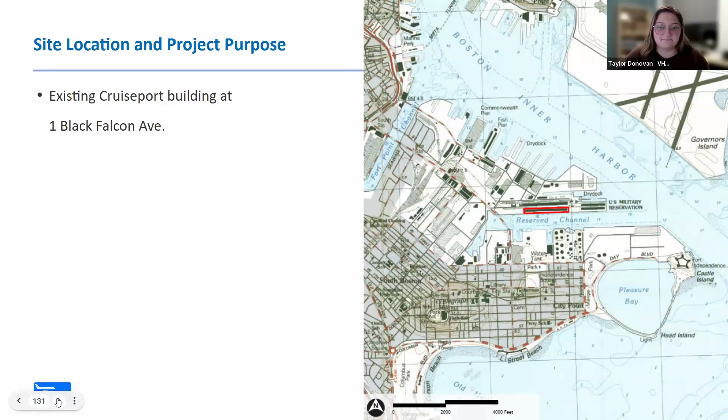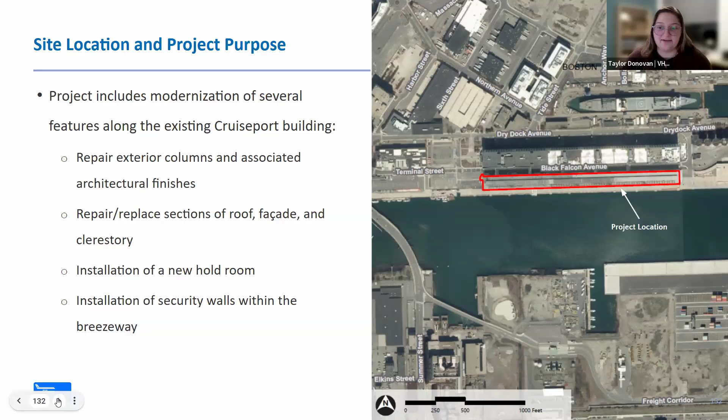Project location is outlined in red in the aerial on the right side of the screen. We are located on the north side of the Reserved Channel, and the project is located within land subject to coastal storm flowage and the 100-foot buffer zone to coastal bank. Some of the modernization features include repair of exterior columns and associated architectural finishes, repair and replacement of sections of the roof, facade, and clerestory, installation of a new hold room, and installation of security walls within the semi-exterior breezeway. Next slide, please.

So as mentioned, the proposed work within resource areas and buffer zone includes repair of exterior columns. This includes concrete pocket removal at the base of the columns, steel repair, and then concrete pour back in those select locations. Installation of a new hold room will occur in the northern portions of the building, away from the resource area, with removal and replacement of wall there. On top of the building, we have repair and replacement of sections of the roof, facade, and clerestory, in support of that new hold room. And then the security walls will be installed within the breezeway.

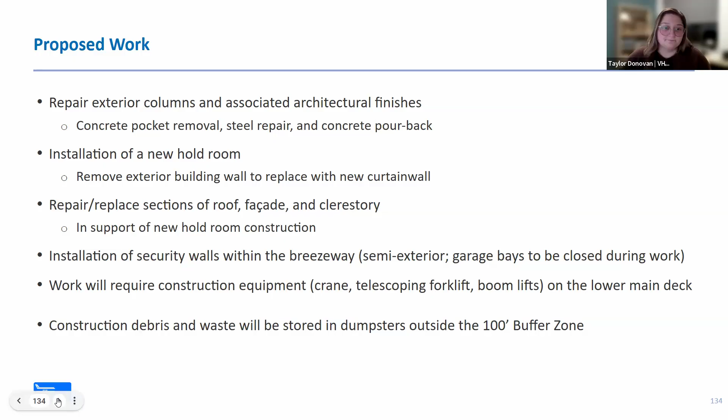We wanted to include this for the commission's knowledge. As mentioned, it's semi-exterior, but the garage bays that allow this area to be accessible and open to the outside will be closed to prevent any impact from that work. There will be construction equipment located on the main deck adjacent to the project site. Similar to the work currently occurring, all dumpsters and construction debris lay-down areas will be located outside the 100-foot buffer zone. We can go to the next slide, please.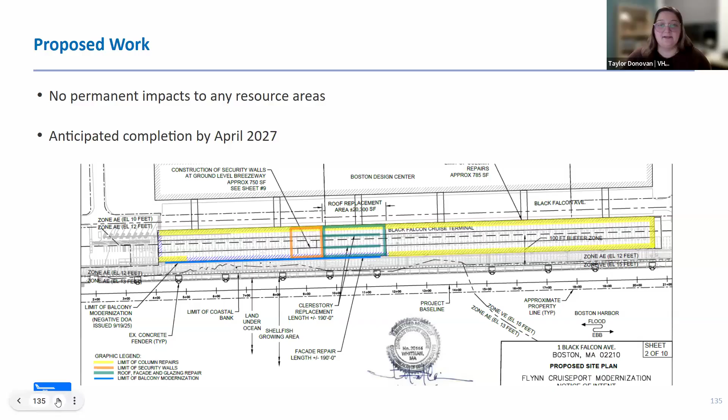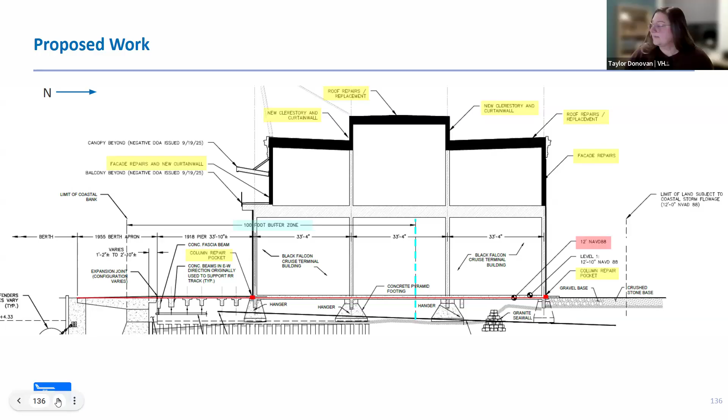And next slide, please.

For our mitigation measures, similar to how the site is currently set up with the work occurring, the erosion controls will remain at the lower edge of the deck along the timber rail, on the south side of the work area. Those erosion controls will remain in place until the start of the active cruise season, which starts April 14th of this year. Then they will be removed and replaced at the start and end of each workday, not to impede other activities occurring on the project site. The active cruise season ends on November 8th, so at that time the erosion controls will be installed and remain in place throughout the next winter season.

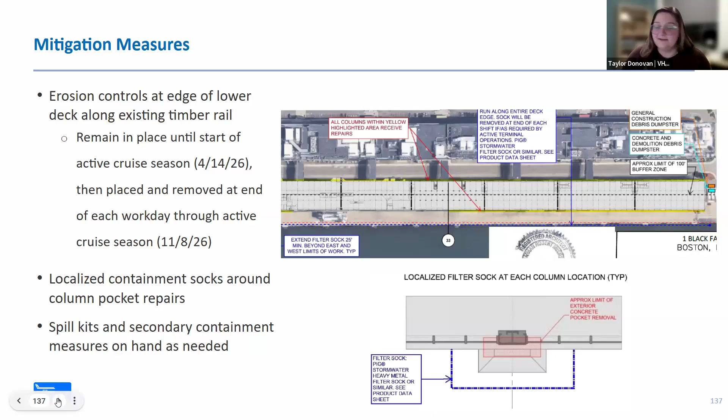There also will be localized containment socks around the column pocket repairs, as shown in that bottom image. The sock will be placed around each column before the concrete removal and pour back work occurs. As is the condition on site today, the spill kits and secondary containment will be used as needed on the site. I believe that is it. Happy to answer any questions the commission may have about the project.

Great, thank you Taylor. I don't have anything on this. Eleanor, what do you have? Thank you Chair Parker, just confirming again that the DEP file number has been assigned for this project, but we didn't have anything else on this.

Okay, thank you. Commissioner Sullivan? I assume this work will start after Sail Boston? No, no, Commissioner Sullivan, this work is going to start soon after permitting. Oh okay. And the other question I had, is this like the everlasting building? You guys come in here every 4 to 6 months doing something on this thing. Is this ever going to get finished?

So the building was built in 1918, so it does require quite a bit of TLC. But we are also admittedly being a little overly cautious in making sure that we come in whenever we think anything we're doing could skew the line into your jurisdiction. So you definitely could accuse us of being just a little overzealous in making sure that we come before you for anything we think could be covered.

No, there's that, it just gives me a reason to believe that when I pay those outrageous parking fees at Logan, it's going towards something. So that's good, makes me feel good. This all sounds eerily familiar, similar to Fenway Park. Yeah, that's it.

Those are my questions. Okay, Commissioner Linay, I don't have any questions. Thank you. Commissioner Wilson, your questions and you're sticking to them. I appreciate that. Commissioner Sullivan, no questions from me either. Thank you. Commissioner Conan, no questions. Okay. Commissioner Smargiassi, no questions. Commissioner Herbst. No questions. Okay, thank you.

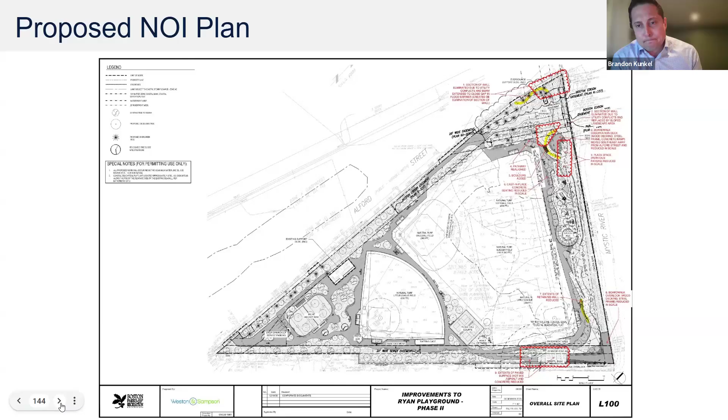Zooming in again for a little more context: the yellow highlighter shows where the previous wall was intended to be. The red shows the conflicts, and anything impacted by the yellow highlight has now become earthen berm and/or raised grade, allowing us to keep the sidewalk in order to get to the overlook. Next slide.

On the south side, this is where the utility conflict was with the National Grid gas line. We made adjustments in the field for the piles, which will adjust the seawall location and make the overlook area on the water side, the dark hatch gray areas, slightly smaller in order to make the grades work. Next slide.

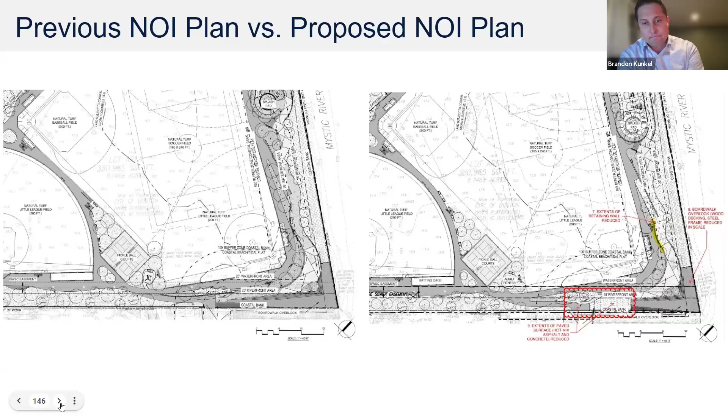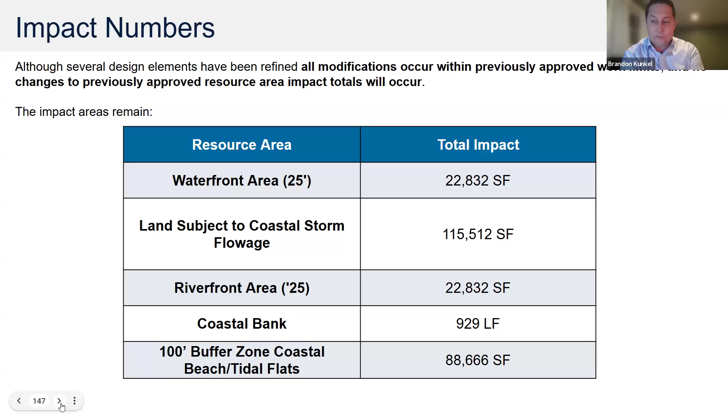Overall, we're still within the required resource areas, which are more or less unchanged. We've received approvals from both Chapter 91 and MEPA already, which should have been submitted as part of the application. We're hoping these are considered minor adjustments as a result of construction and below-grade utility conflicts, but we're still able to achieve the resilience goals by building the earthen berm and adjusting the proposed seawall location. Next slide. That'll do it, hopefully I'm able to answer questions at this time.

Okay, thank you Brandon. Quick question: I was looking at the email, just to clarify, you don't have to file a Notice of Project Change with MEPA? We do not, no, they considered these minor enough as a result of construction that they didn't see a need for significant change. Okay good, thank you. Sometimes government speak on emails can be a little confusing. I'm not quite sure they understood it either - yeah, I didn't understand it.

Okay, Elena, what do you have on this? Thank you, Chair Parker, we didn't have anything to add to this.

Okay, thank you. Commissioner Sullivan: Brandon, just for the record, can you describe what an earthen berm is?

The height, materials - clay, whatever - it will ultimately be covered with vegetation and plant. However, 3 feet below, in order to minimize the loads downward on the utilities that were conflicts, we're going to be over-excavating, replacing it with lightweight fill, putting 3 feet of standard backfill and topsoil on top to ensure the lightweight fill does not float away during storm events. We'll also be putting in an impermeable liner to ensure water does not migrate below the berm and compromise or blow it out from the land side.

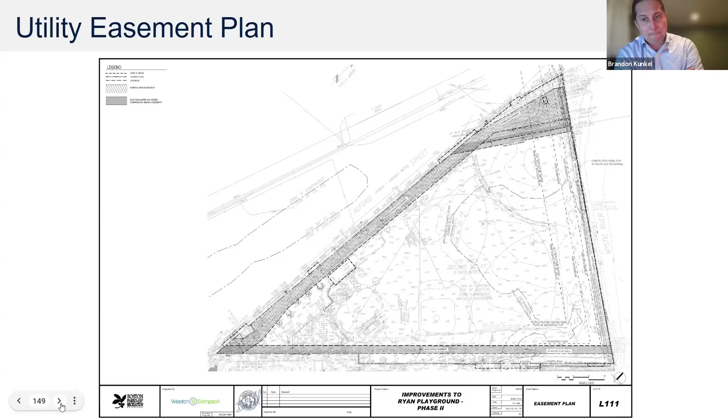Thank you. Commissioner Wilson: that teed up one of my questions. In terms legalistically, if this were considered some sort of flood protection feature, with the shift from seawall to vegetated berm, does that trigger anything down the line with FEMA or understandings with the Army Corps and stuff like that?

Not at this time, anyway. We've been in touch with the Army Corps - they have their own initiatives running adjacent to the park, so we've been in constant coordination with them, as well as all of the projects going with Alford Street in the city and the MBTA. We're well aware of the many initiatives, they're aware of ours, and to our understanding there's no conflicts now.

Okay, appreciate that. It's a lot of little puzzle pieces that come together. I guess to take that opportunity, do we have any better guidance on what they're looking for? I know Fort Point Channel had similar clay core versus lightweight fill versus utility seawall piling type conflicts.

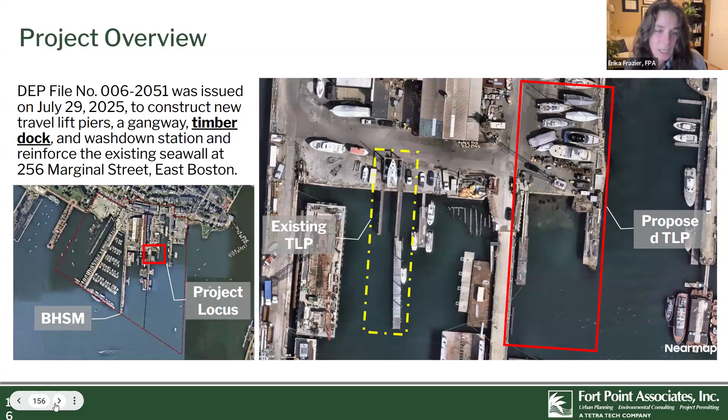So the original order of conditions was issued in July to construct the new travel lift piers, gangway, timber dock, and washdown station, and reinforce the existing seawall at 256 Marginal Street, East Boston, as Chair Parker mentioned. This amendment is to update the associated timber dock.

Next slide, please. So the original design on the left-hand side was to construct an approximately 1,770 square foot timber floating dock, installing 11 steel pipe piles that were 12 inches in diameter. The overall width, which was 8 feet, was deemed too narrow, infeasible, and unsustainable for marine industrial operations. So the proposed design is to construct a 2,370 square foot concrete floating dock that goes from 9.8 feet in width to 13.1 feet in width.

This update to a concrete floating dock with the increased width required larger piles but fewer of them. So it will be 7 steel pipe piles in total: 3 that are 18 inches in diameter and 4 which are 22 inches in diameter.

The increase of impacts is to the land under ocean and DPA resource area. The original order of conditions was for 67 square feet, and these changes would increase that to 72 square feet, which is a 5 square foot increase in impact. I believe that's all that we had here today.

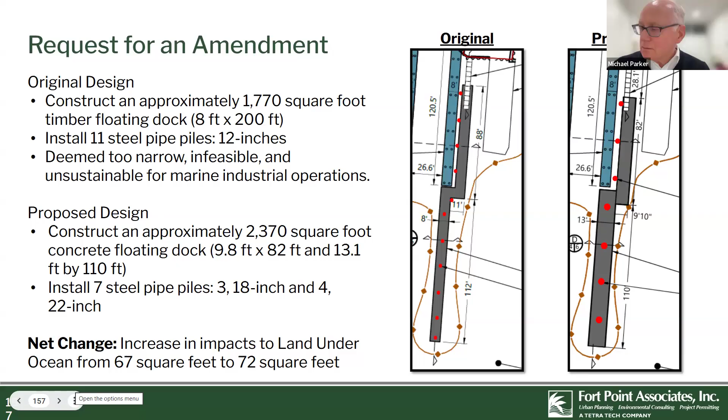We tried to highlight in red the new locations. Thank you. Commissioner Smargiassi: no comments on these changes. Thank you. Commissioner Herbst: nothing from me, thanks. Okay, great. Elena, any hands raised, any emails, any chat testimony? No to all of the above. So with that, I would entertain a motion to amend the order of conditions and close the hearing.

I'd love to make a motion to close the hearing. I'll second that. Commissioner Sullivan, aye. Commissioner Linay, aye. Commissioner Wilson, aye. Commissioner Conan, aye. Commissioner Smargiassi, aye. Commissioner Herbst, aye. And I vote aye. That carries 7-0. Thank you. Okay, thank you. Have a good night. You too.

There have been 2 continuances: continued as notice of intent for DEP file number 0061996, Boston file number 2024-021, and notice of intent for DEP file number 0062042, Boston file number 2025-014. We'll now begin our regular meeting. First item on the agenda is a request for a certificate of compliance for DEP file number 0061644 for the culvert and sinkhole repairs located at Pier 4, Charlestown Navy Yard. Resource areas: land subject to coastal storm flowage, land under ocean, and land containing shellfish.

What do we have on that, Elena? Staff conducted a site visit. There are some photos in the drive folder, and we would recommend issuing a complete certificate of compliance with perpetual maintenance conditions numbers 43 and 63, but we did want to flag that there seems to be some water pooling happening in that area.

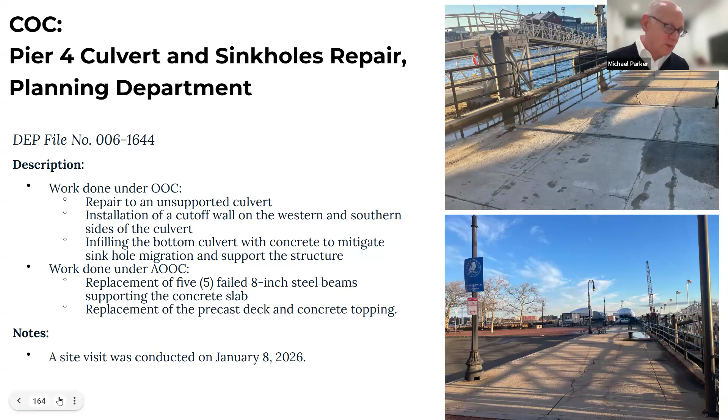Okay, next item on the agenda: request for a certificate of compliance for DEP file number 0061936, and Boston file number 2023-021, from Weston and Sampson on behalf of the Boston Public Works Department for the proposed rehabilitation of the Glenwood Avenue pedestrian bridge that crosses Neponset River and the MBTA right-of-way, located at Glenwood Ave in Hyde Park. Resource areas: riverfront area, waterfront area, 100-foot buffer zone to inland bank.

Commissioner Herbst, do you remember this one? Yes, I do. Wow, that was a while ago. Yeah, well, it's not so far from me. Not in my backyard, but close. Yeah. Okay. Any questions for Eleanor?

Nope. Great. And I'll just note that there are additional photos in the drive and the bridge looks amazing. If you have a chance to go out there, I'd highly recommend it. And we would also recommend issuing a certificate of compliance with perpetual maintenance conditions number 60, 67, 78, 86, 87, and 91.

Okay, so with that, I'd entertain a motion to issue a certificate of compliance for DEP file number 0061936 and Boston file number 2023-021, retaining perpetual maintenance conditions of the order of conditions 60, 67, 78, 86, 87, and 91. I'd like to make that motion and I pre-approve any friendly amendments.

Thank you. Second that. Thank you. Commissioner Sullivan, aye. Commissioner Linay, aye. Commissioner Wilson -- I missed this the first time around, and we got to take the kids out there, this looks amazing -- aye. Great. Commissioner Conan, aye. Commissioner Smargiassi, aye. Commissioner Herbst, aye. And I vote aye. That carries 7-0.

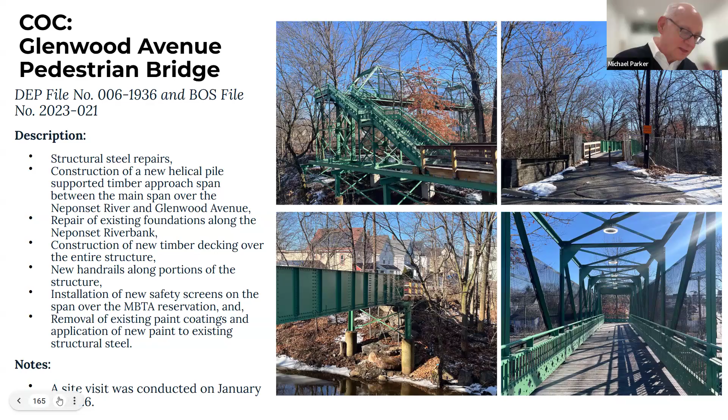Let's see, we have another one. Okay, next item. Request for a certificate of compliance for DEP file number 0061542 from Ecotech on behalf of the Holyhood Cemetery Association, for the proposed partial building demolition and construction of a new storage building located at the St. Joseph Cemetery, 1000 LaGrange Street, West Roxbury. Bordering land subject to flooding is a resource area, and riverfront area.

Eleanor, what do you have on this? Yes, so similarly, we conducted a site visit. Everything seems to be done in compliance with the permit that was issued. As you can see, also a lovely place to take a walk. And we would recommend issuing a certificate of compliance with the following maintenance conditions: 42, 44, 48, and 57.

Okay. Any questions for Eleanor?

With that, I would entertain a motion to issue a certificate of compliance for DEP file number 0061542, retaining the perpetual maintenance conditions at conditions 42, 42, 42, 44, 48, and 57.

I'd like to make a motion for the Holyhood, not the Hollywood. Oh, that's right. Well, they're all dead. They're all holy, come on.

That's right, sorry. Do we have a second? Second. Okay, thank you. Commissioner Sullivan, aye. Commissioner Linay, aye. Commissioner Wilson, aye. Commissioner Conan, aye. Commissioner Smargiassi, aye. Commissioner Herbst, aye. And I vote aye.

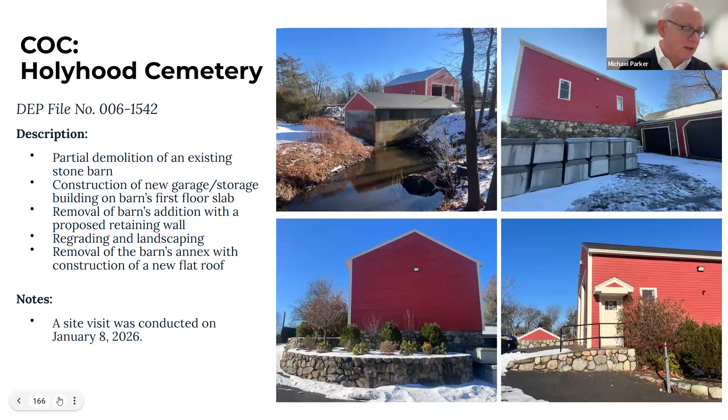That carries 7-0. Okay, Eleanor, administrative updates, quickly please. I'm sorry, there are some.

First up, we have another report from the Environmental Monitor for 181 to 183 Coleridge Street, which is a project that has an open superseding order of conditions. Those are in the drive folder for the commission to review, and if anybody has questions about it once you've had a chance to review them, please let me know and I can reach out to the project team and get those answered. Does anybody have questions at this time? Nope.

Next up, a similar item, we received the end of year report from DCR about their Charles River Vegetation Management Plan. It's the end of the year summary. Again, if anybody has questions that come up once you have a chance to review it, I'm happy to reach out to that project team and get answers. But if anybody has questions right now, happy to jot them down. No questions. Okay, great.

Then we have a project that will probably sound familiar, 201 to 259 Independence Drive. This is a site where the commission issued an enforcement order a while back because they went beyond the boundary of the DOA they received, the limit of work, and they cleared a lot of trees. We have been going back and forth with them to try to come up with a planting plan that seems appropriate, and at this point we think we've reached that version of the plan.